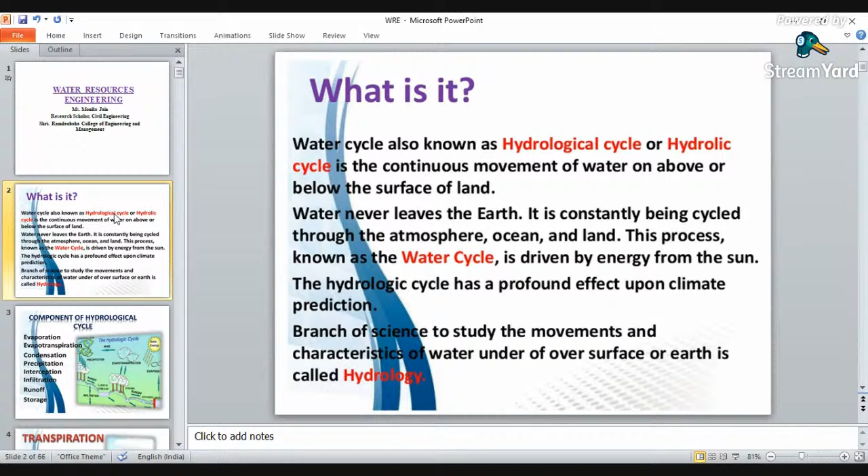There are various components of the hydrologic cycle, as we have seen, like evaporation, evapotranspiration, condensation, precipitation, interception, infiltration, runoff, and surface storage.

Now we'll see one by one, starting with evaporation. What is evaporation? It is one of the major processes in the hydrologic cycle, and evaporation is nothing but the transfer of water from the surface of the earth to the atmosphere. By evaporation, water is actually converting from its liquid state to the gaseous or vaporous state. This transfer occurs when some molecules in the water attain kinetic energy and move into the atmosphere.

This evaporation happens because of a few factors: temperature, humidity, the speed of the air or wind speed, and the energy of the environment or atmosphere, that is solar radiation. You cannot measure the quantity of direct evaporation at all points, but there are a few methods by which we can measure the quantity of evaporation. The principal source of water vapor is the ocean, but evaporation also occurs from soil, snow, drizzles, ice, etc.

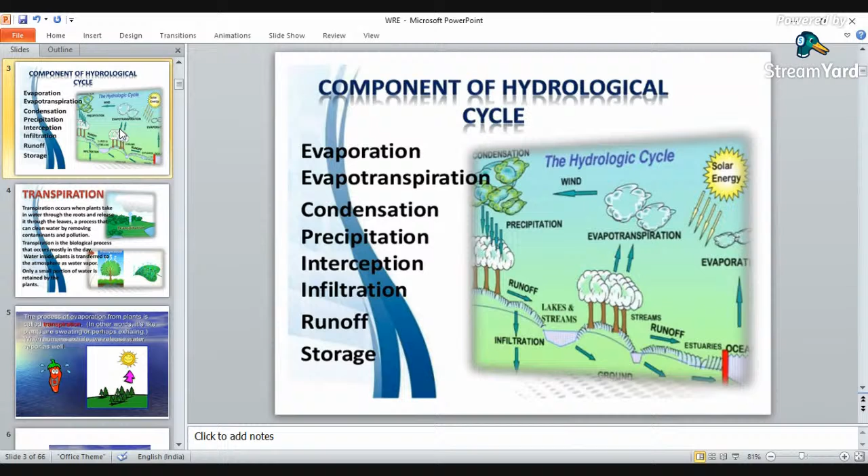So the next process in your hydrologic cycle is transpiration. What is transpiration? Transpiration is a biological process in which your water is lost in the form of water vapor from the aerial parts of the plant.

What is evaporation? Evaporation is a process in which your water is converting its state from liquid to vaporous state but from the surface of earth. Whereas transpiration is the process in which water is lost in the form of water vapor from the surface of the plants or from the green bodies. So transpiration occurs when a plant takes in water through the roots and releases it through the leaves,

a process that can clean water by removing contaminants and pollutants. There are different types of transpiration. Transpiration in plants occurs as water absorbed by the roots, then water travels through the plant roots up to the leaves, and then water vapor loss happens from the leaf, from the pores of the leaf, and it evaporates into the atmosphere. This process is termed as your transpiration.

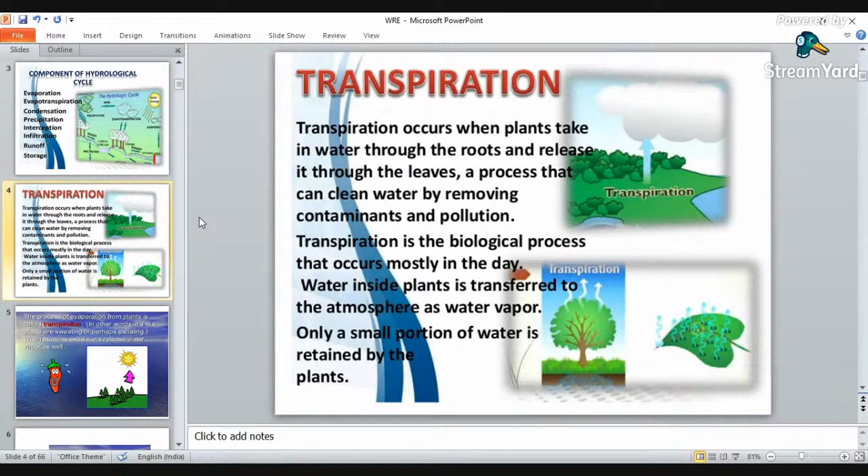Now there are three types of transpiration: stomatal transpiration, then lenticular transpiration and cuticular transpiration. These terms are defined on the basis of parts of the green bodies from where the transpiration, or the evaporation from the green body, is happening.

There are various factors on which the transpiration process depends, and those factors are the orientation of the leaf, where your leaf is actually orienting, then the water state, so level or status of water into the plant, then structural configuration of leaf and number of stomata present in your leaf structures.

Then again there are a few environmental factors like humidity, temperature, light and air. Humidity: more will be the humidity, lesser will be the transpiration. Then temperature: higher will be the temperature and lower the humidity, then higher will be the transpiration. But higher will be the humidity, lower will be the temperature, then less will be the transpiration. Then light, as the stomata are open during the daytime and close in the dark time.

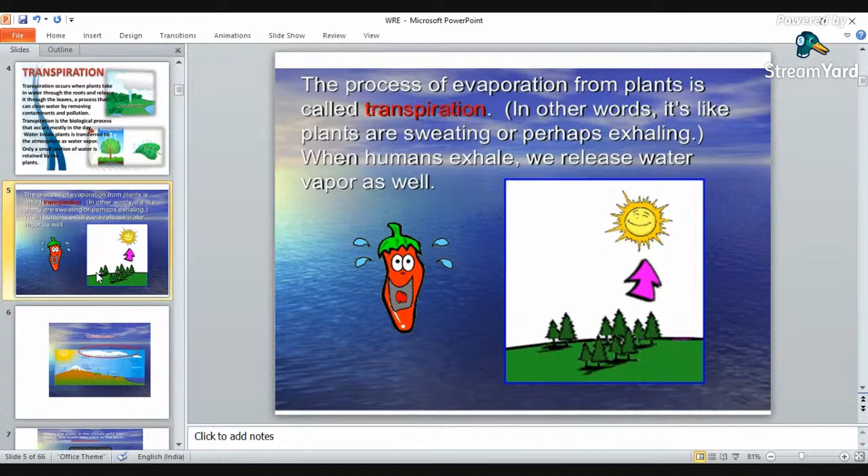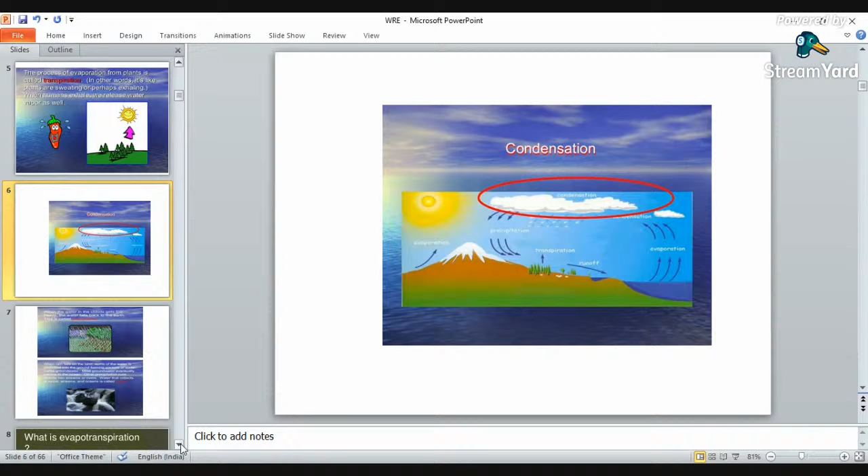Then there is precipitation. Precipitation is when water in the clouds gets too heavy in the form of water, falls back in the form of water to the earth. This is called precipitation.

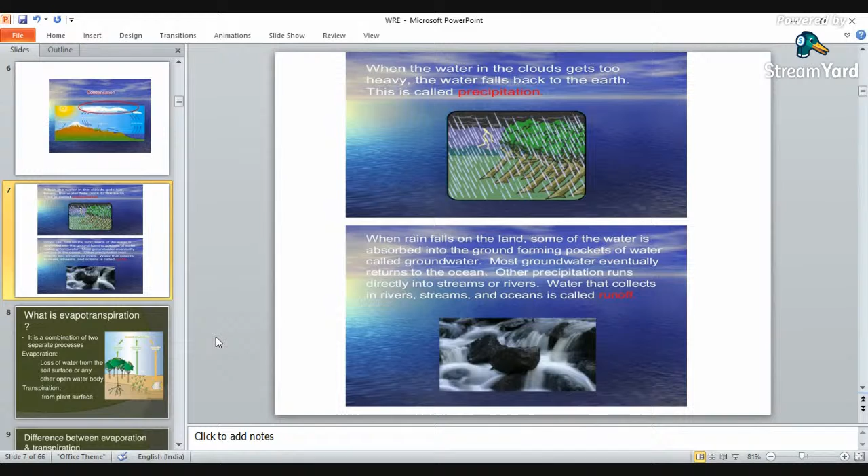The last term is your runoff. So when rain falls on the land, some of the water is absorbed into the ground, forming pockets of water called groundwater. That is the amount of water which will percolate deep into the ground and adds to the groundwater table, termed as your groundwater. Most of the groundwater eventually returns to the ocean from the surface only. The other precipitation runs directly into the streams. So that part of the water which will not get percolated into the groundwater and stays on the surface of earth is termed as your runoff.

So basically, the process of the hydrologic cycle is a continuous process which involves various stages like evaporation, transpiration, condensation, precipitation, then surface storage and runoff. All these steps or processes are continuous, happening simultaneously or one after the other.

Then there is evapotranspiration. Now evapotranspiration, as the name itself is suggesting, is a combination of two processes, that is evaporation and transpiration. Evaporation is nothing but loss of water from the soil surface, and transpiration is nothing but the loss of water from the plant surface.

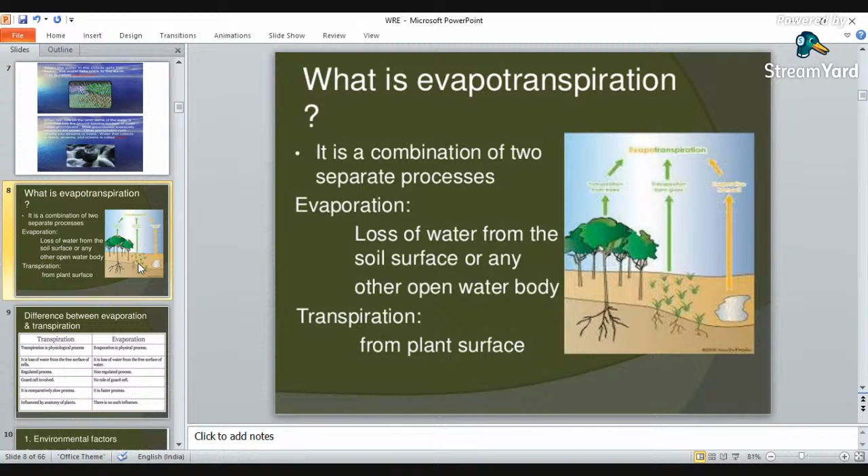Now, what is the basic difference between transpiration and evaporation? Transpiration is a physiological process and evaporation is a physical process. Is transpiration a continuous process, or is evaporation a continuous process?

Transpiration is a comparatively slow process, but evaporation is a quite faster process. Transpiration depends on the anatomy and configuration of the plant cell, but evaporation has no such influence.

If there is an open surface with water present, evaporation can happen provided there is sunlight or solar radiation. There are a few factors which affect transpiration or evapotranspiration, that is air temperature, humidity, and movement of air. The more the temperature, the higher the evapotranspiration. The more the humidity, the lesser the evapotranspiration. There are two basic terms related to evapotranspiration: potential evapotranspiration and actual evapotranspiration.

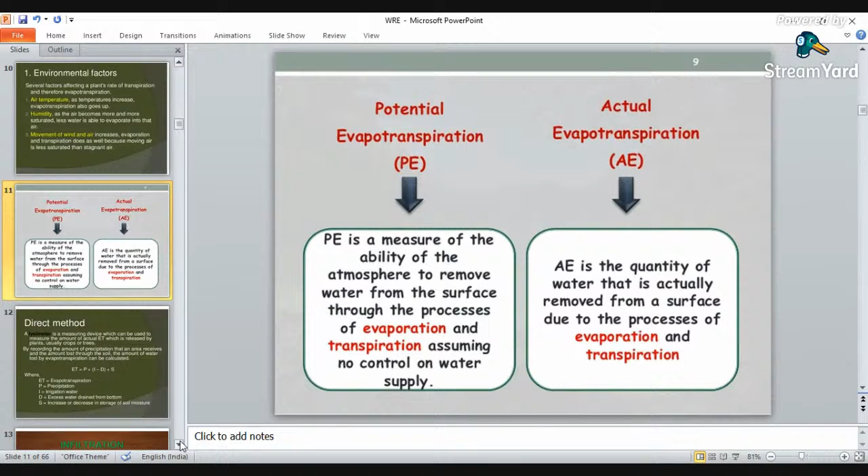There are a few empirical as well as practical and experimental methods by which we can find out evapotranspiration. A lysimeter is a device useful to measure evapotranspiration. The amount of actual evapotranspiration released by plants from crops as well as trees is calculated using the lysimeter.

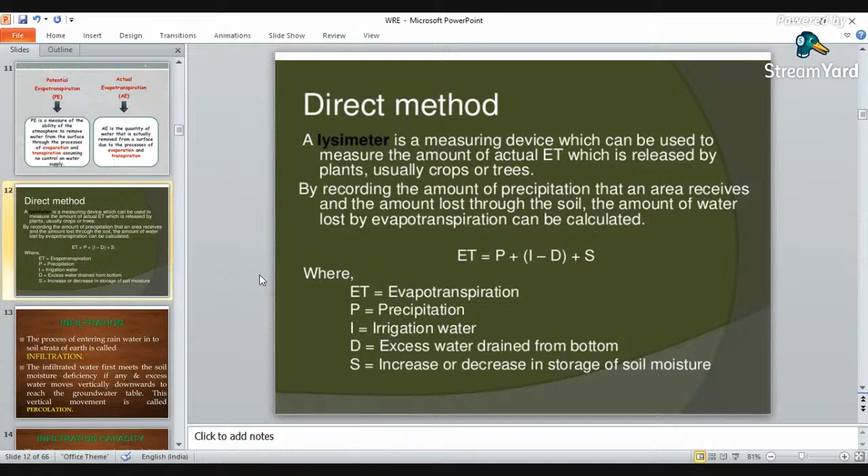There is a formula by which you can find out the actual evapotranspiration quantity, the ET value: ET equals P plus I minus D plus S, where ET is evapotranspiration, P is precipitation, I is irrigation water, D is excess water, which is nothing but runoff water, and S is the increase or decrease in the storage of soil.

The next fundamental related to hydrology is infiltration. Infiltration is the process by which water on the ground surface enters the soil, or infiltrates into the soil.

There is one more term related to infiltration, that is infiltration capacity. Infiltration capacity is the maximum amount of water that can infiltrate into the soil strata or earth surface. It is measured in meters per day, or length per unit time.

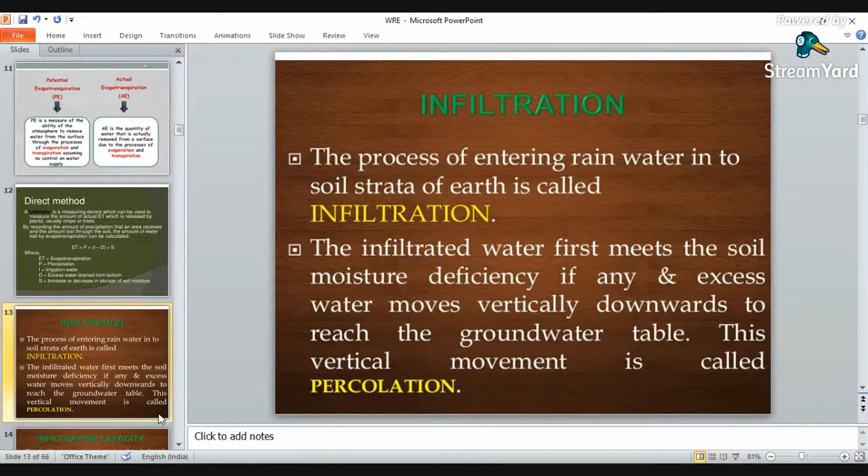Infiltration capacity is the maximum rate or maximum capacity of the soil by which water can be absorbed, and it is denoted by small f. If your rainfall rate I is greater than or equals to the infiltration capacity, then FA equals F, where FA is the actual infiltration capacity, I is the rate of rainfall, and F is the infiltration capacity.

So if I is greater than or equals to small f, then your actual infiltration capacity will be equal to your infiltration capacity. It means there will be no percolation.

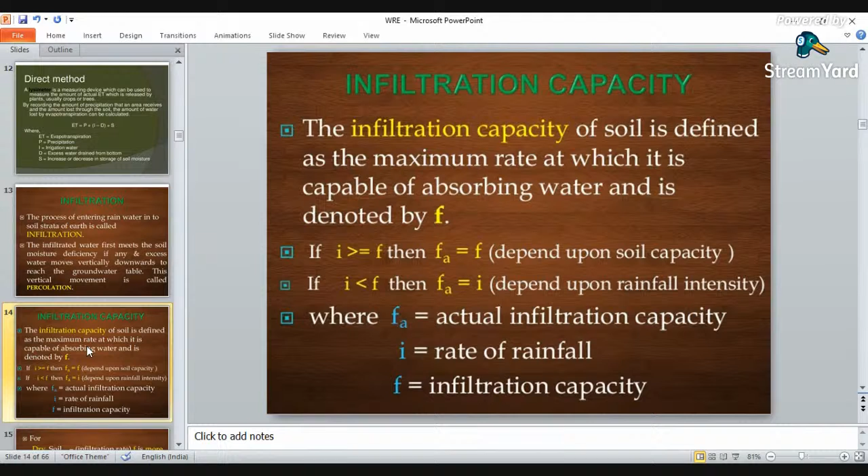And if your rate of rainfall I is lesser than your infiltration capacity, then in this case FA equals I, that is actual infiltration capacity equals rate of rainfall. So in this case, if the saturation level reaches up to the maximum requirement of the soil, that is saturation of soil water requirement, then your water may percolate.

So if your F is more, it means it is dry soil, because F is nothing but your infiltration capacity. And if F is less, then it is moist soil.

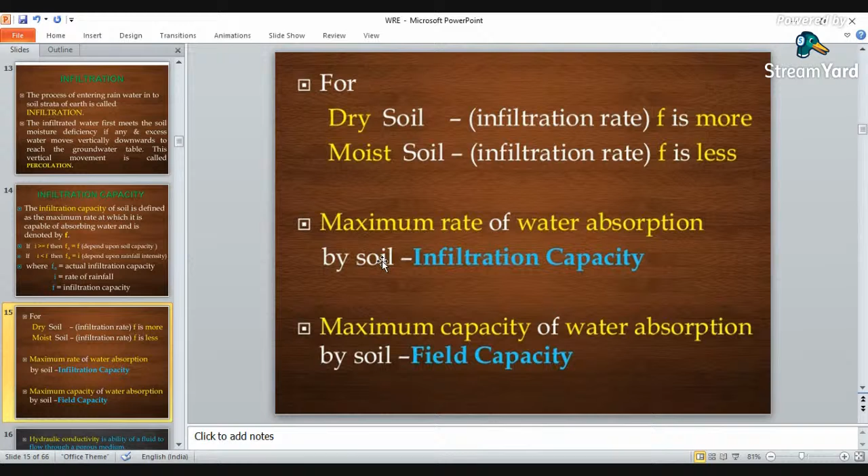There is one more term related with infiltration and precipitation, that is hydraulic conductivity. Hydraulic conductivity is the ability of a fluid to flow through a porous medium. It is determined by the size and shape of the pore space in the medium and the viscosity of the fluid. It is expressed as the volume of fluid that will move in unit time under a unit hydraulic gradient through a unit area measured perpendicular to the direction of flow.

Now, the infiltration process is continuous only if there is room available for additional water into the soil surface. The available volume for additional water in the soil depends on the porosity of the soil and the rate at which previously infiltrated water can move away from the surface through the soil. The maximum rate at which water can enter the soil in a given condition is the infiltration capacity, which occurs when the water arriving on the soil surface is greater than the infiltration capacity.

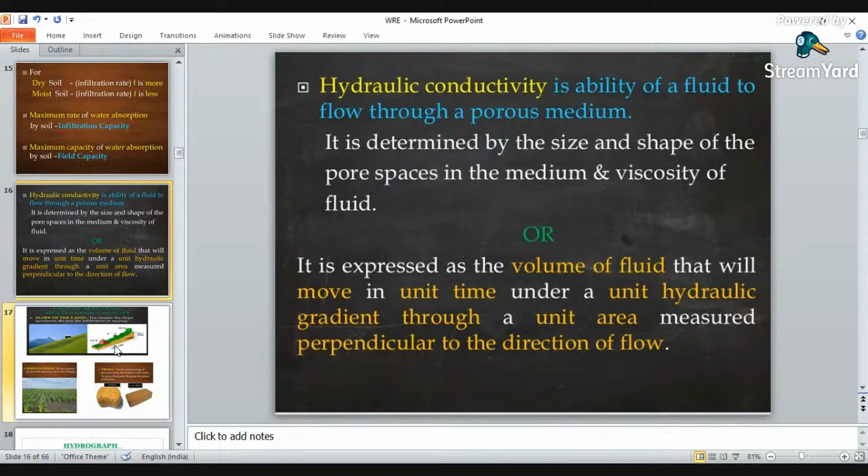Now there are a few factors on which your infiltration capacity depends. That is the slope of the land. More will be the slope, lesser will be the infiltration, because water will try to get into runoff. It will run under the gravitational force, that is why it will flow as runoff water.

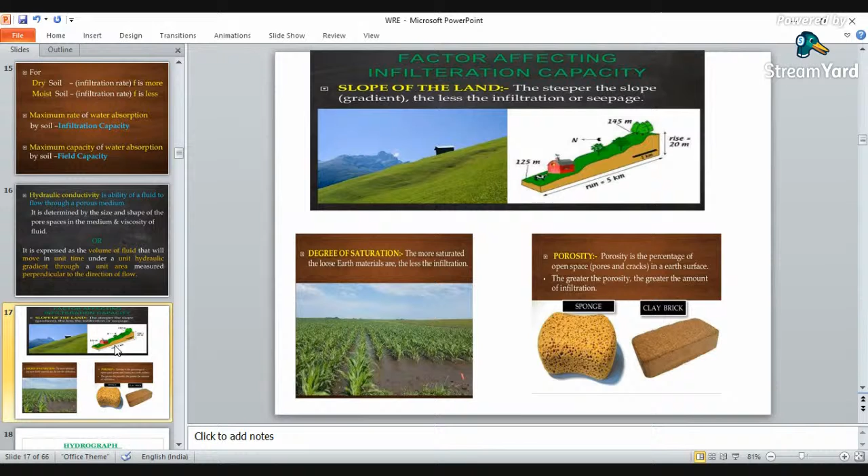Then degree of saturation - more saturated the soil, lesser will be the infiltration. Then porosity - more porous the soil, more will be the infiltration. Like soil and concrete, they are more porous materials as compared with metallic materials, so there will be more infiltration rate into these materials.

Then your next topic is hydrographs. Hydrographs are nothing but the plots which are plotted for the discharge and the time. These are graphs showing the rate of flow versus time over a specific point in a river or other channel. The rate of flow is typically expressed in cubic meters per second or meter cube per second, and time is expressed in seconds, minutes, or hours.

So it is a graph actually showing the total volume of water that is entering into the catchment, or you may say leaving the catchment, over a particular period of time.

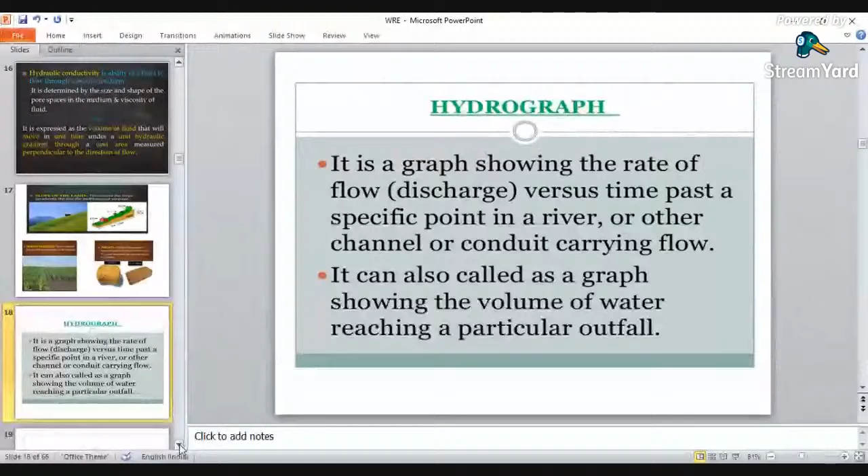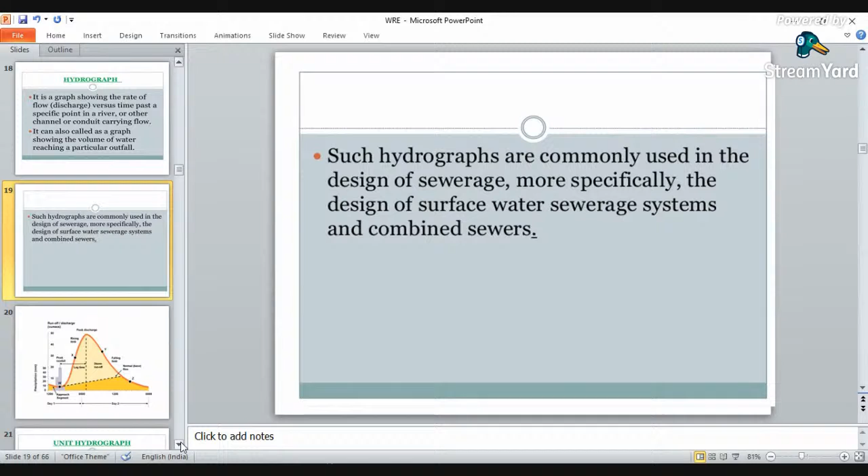Hydrographs are used for design of sewerage, specifically design of surface water sewer pipelines, water pipelines, etc. There are a few elements of this hydrograph. This is how the hydrographs look like.

Here, there are a few terminologies related with this hydrograph. First is your discharge. Then there is one rising limb, from W to X, this limb is your rising limb. Then there is a peak discharge - this discharge is your peak discharge. Then there is a recession or falling limb - this limb is termed as recession or falling limb.

Then there is a lag time. Lag time is the time from the first peak rainfall to the peak discharge. This is termed as your lag time. And the time of peak is the total time from the first rainfall point to the peak discharge point. We have to read this graph from left to right.

Here you are given the precipitation. This is nothing but your discharge. It may be either in meter cube per second or in mm of depth to the duration. Here your duration is given in days, but it may be also in hours, seconds, or minutes.

So what is discharge? Discharge is nothing but the rate of flow passing through a specific location into a river, channel, or any water body. It is measured at a specific point where you have to plot your hydrograph.

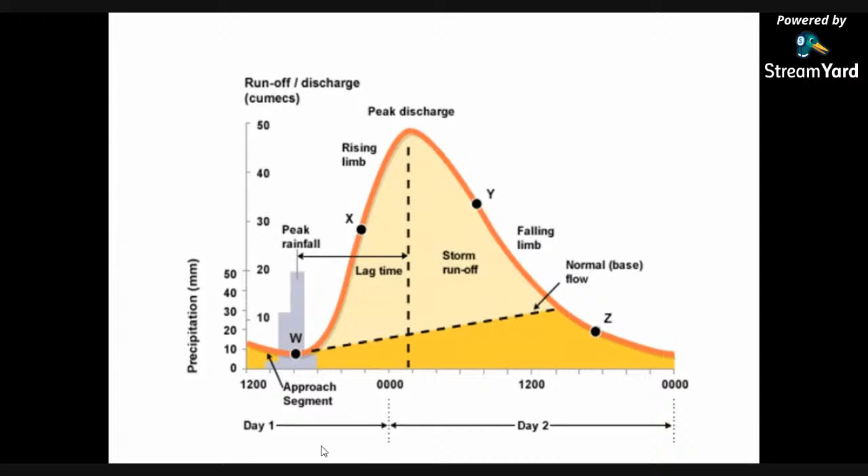There are so many types of hydrographs like storm hydrograph, flood hydrograph, annual hydrograph, then direct runoff hydrograph. Then one more basic and very important term related with the hydrograph is the unit hydrograph. Unit hydrograph is the amount of runoff resulting from 1 centimeter of rainfall excess.

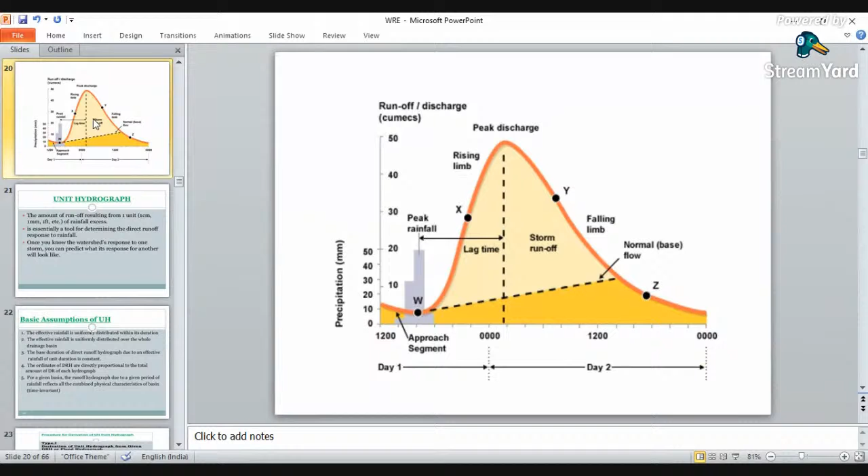Now, in a hydrograph, you may plot any amount of discharge for any amount of duration. But in a unit hydrograph, you have to plot a graph of water for the 1 centimeter or 1 unit of rainfall excess. It is the essential tool for determining the direct runoff response to the rainfall.

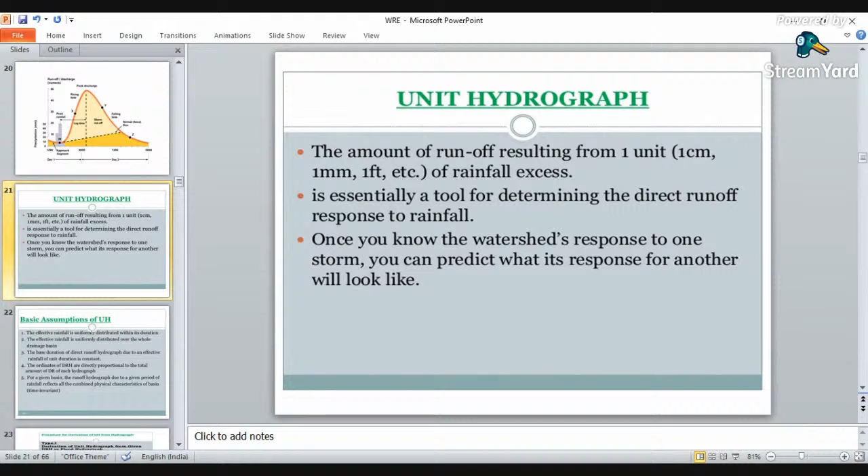Once we know the unit hydrograph for any catchment, then you may go for multiple hydrographs related with that - 2 centimeter hydrograph, 4 centimeter hydrograph. So once you know the unit hydrograph, you can plot the hydrograph related with the respective different depths of the catchment flows or catchment rainfalls.

There are a few basic assumptions related with the unit hydrograph. The effective rainfall is uniformly distributed within its duration. Then again, the effective rainfall is uniformly distributed over the whole drainage basin.

The base duration of the direct runoff hydrograph due to an effective rainfall of unit duration is constant. The ordinates of DRH, that is direct runoff hydrograph, are directly proportional to the total amount of direct runoff of each hydrograph. For a given basin, the runoff hydrograph due to a given period of rainfall reflects all the combined physical characteristics of the basin, that is time invariant.

Here, two assumptions are very important. One, we have to consider uniform rainfall distribution, that is, the rainfall distribution over a catchment is uniform. Second, it is time invariant, that is, for a given basin, the runoff hydrograph due to a given period of rainfall reflects all the combined physical characteristics of the basin, having the same physical properties over time for the rainfall, catchment, and runoff.

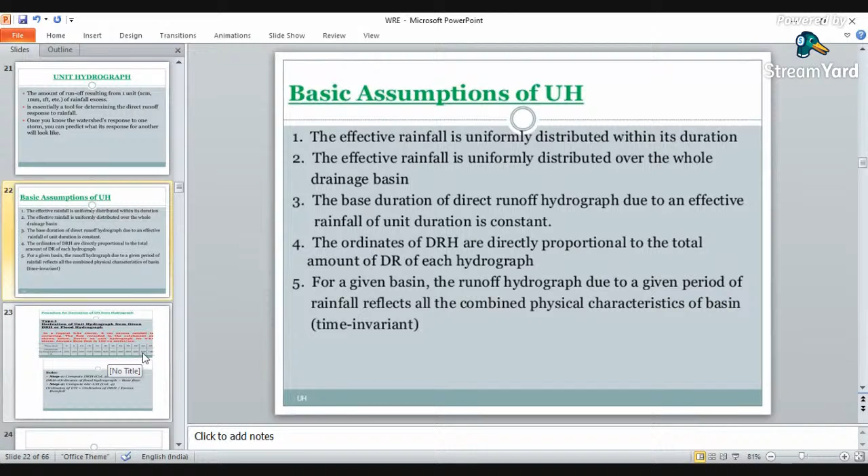So how can we draw a hydrograph? Just go through it. If you have to plot a hydrograph, a problem is given here. Just read out this problem now.

In a typical 6-hour storm, 4 centimeter excess rainfall is occurring. The flow recorded in the catchment is shown below. Derive a unit hydrograph for the 6-hour storm, assuming base flow as 100 cubic meter per second. You have to find out the unit hydrograph for 6 hours, that is 1 centimeter of rainfall for a 6-hour storm. The base flow is given as 100 meter cube per second.

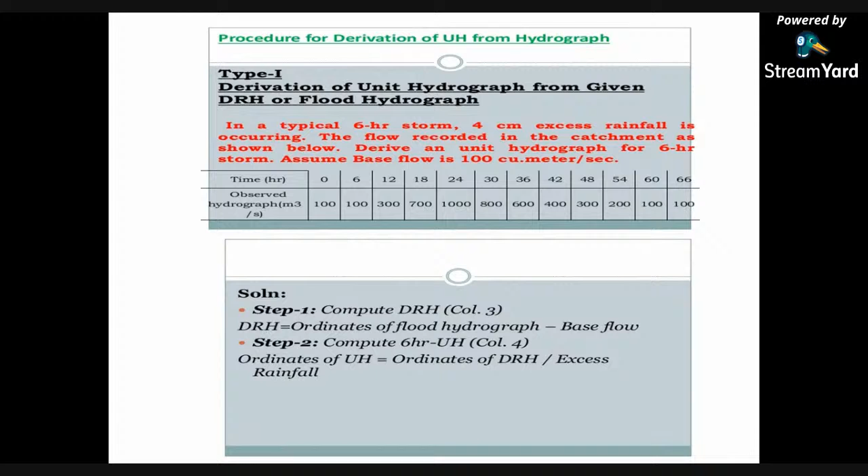Now you are given two ordinates, that is, time is given and then hydrograph values are given, discharge is given. First of all we have to find out the direct runoff hydrograph, that is DRH, and then find out the unit hydrograph for the 6-hour duration. So we are given the time duration, and this is your observed hydrograph readings. These two columns are given to you.

Now in the third column, you have to reduce the base flow. Here your base flow is given as 100 cubic meter per second. So in the third column, you subtract the base flow from the observed hydrograph reading: 100 minus 100 equals 0, 100 minus 100 equals 0, 300 minus 100 equals 200, and so on. This is your direct runoff hydrograph, that is, the amount of hydrograph that will flow on the surface.

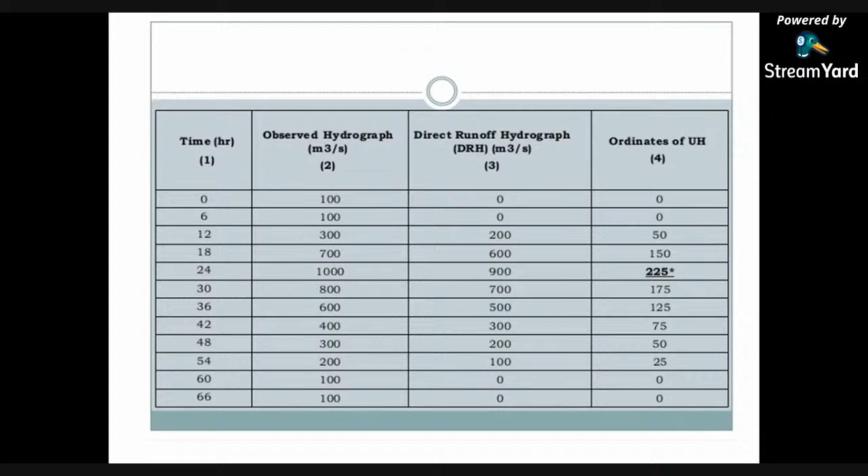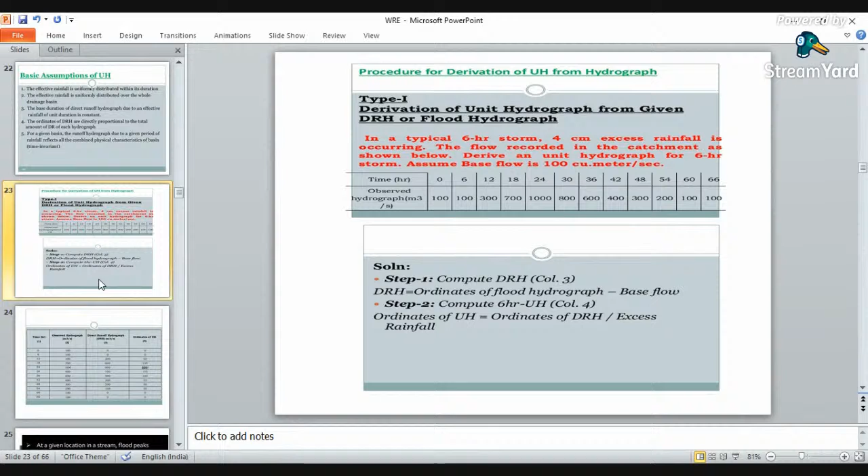Then you have to find the ordinates of the unit hydrograph. These are calculated as the amount of direct runoff hydrograph divided by the given excess rainfall. You are given 4 centimeter excess rainfall, so the ordinates given are for 4 centimeters of rainfall. To find the ordinates for 1 centimeter, divide these ordinates by 4: 200 divided by 4 equals 50, 600 divided by 4 equals 150, and so on. At the end, you may also plot a graph of time versus discharge, with discharge on the y-axis and time on the x-axis.

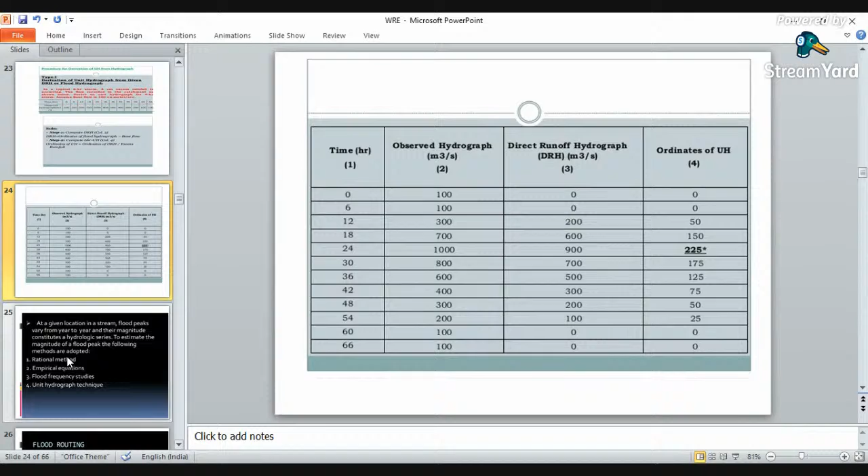There are so many methods by which you can estimate the magnitude of discharge, that is, by rational methods, empirical methods. Unit hydrograph is one of the methods, and flood frequency studies is another.

The next topic is flood routing. Flood routing is a process or technique. It is useful in determining the flood hydrograph at a section of a river by utilizing the data of flood flow at one or more upstream sections. If you have a hydrograph for the upstream side, or the downstream side, by using that flood hydrograph at any one section of the catchment, you can find out the hydrograph of another section of the catchment, that is termed flood routing or the flood hydrograph.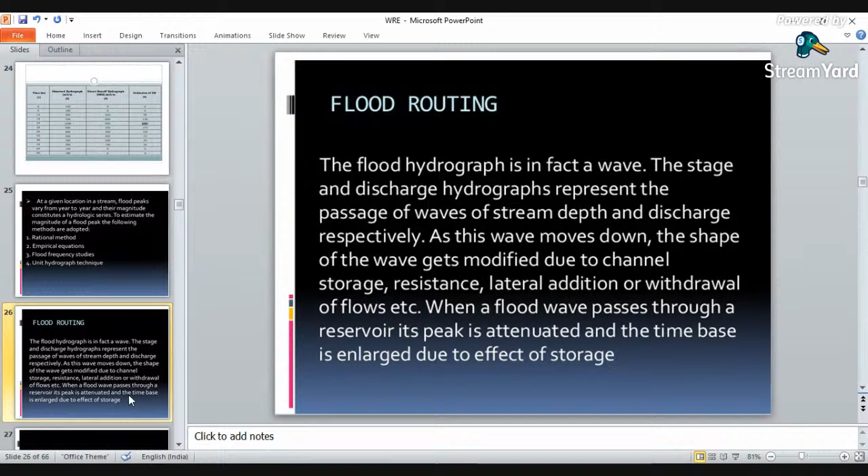In flood routing analysis, we have to determine the flow hydrograph at a given point on a watershed from the known hydrograph on either the upstream or downstream side. So what will happen? There is an attenuation. Suppose on the upstream side the depth of the hydrograph is high, so on the downstream side there will be an attenuation. Attenuation is nothing but the reduction in the peak of that hydrograph. The peak of the outflow hydrograph will be smaller than that of the inflow hydrograph, and this reduction in the peak of the hydrograph is termed attenuation.

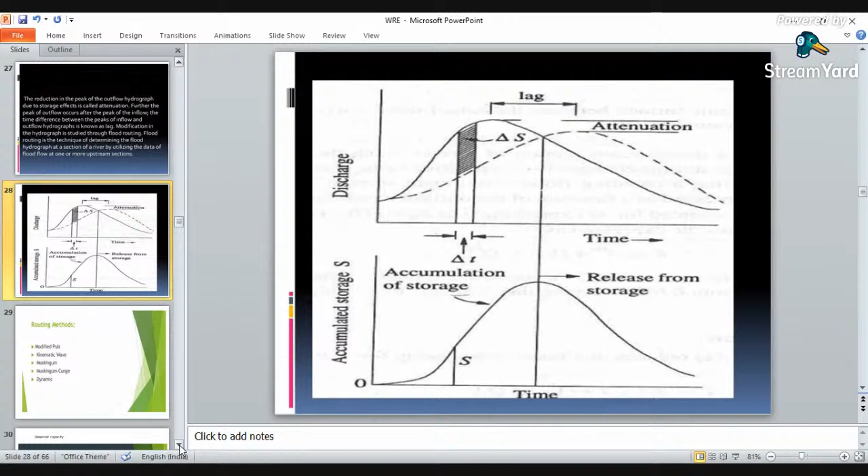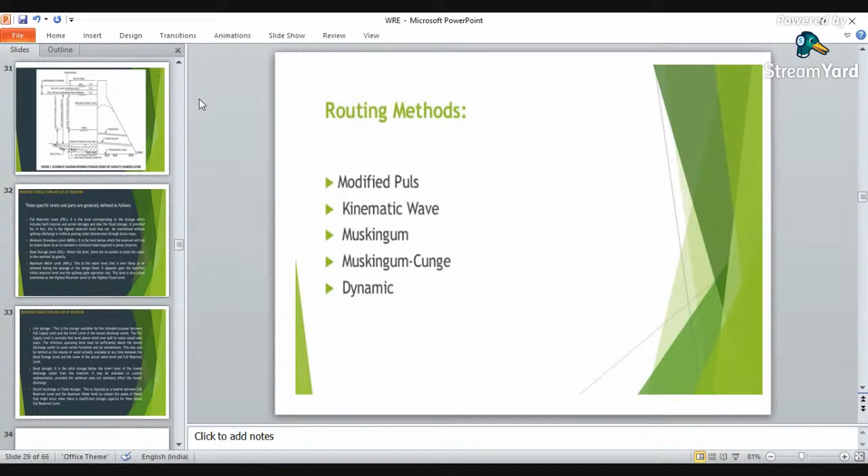So there are a few methods for flood routing. The Muskingum method is one, where we are given the equation S equals K times [x times I plus 1 minus x into O]. By using this equation, you can directly find the flood discharge at another point, or on the downstream side of the catchment. Then there is the reservoir routing method, the dynamic method, and the modified Puls method.

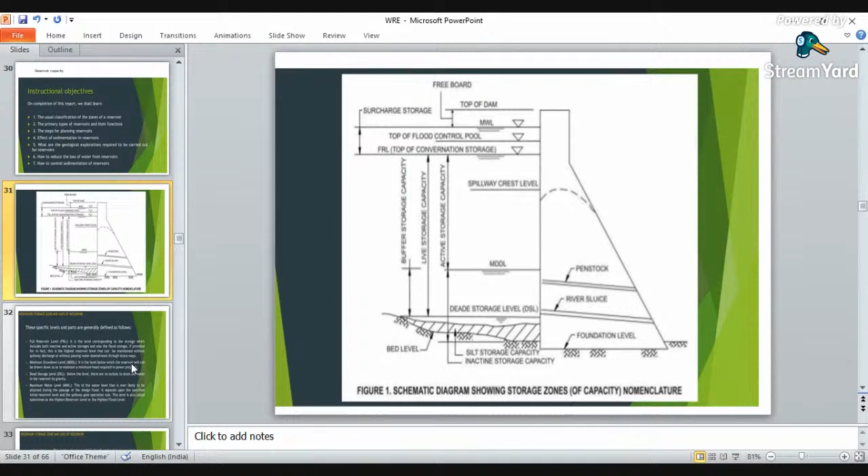So dead storage level is the... here, see here, it is the dead storage level. This level is your dead storage level. This level is your spillway crest level. Then this is your foundation level. This is the bed level of your storage. So dead storage is basically provided below the level where there are no outlets.

Then there is a full reservoir level. It is the level up to which you can attenuate the maximum amount of water, or maximum flood storage can be provided up to the full reservoir level.

Then minimum drawdown level is the level below which the reservoir will not be drawn down, so as to maintain a minimum head required for the power projects. The maximum water level is the water level that is ever likely to be attained during the passage of the design flood. By this, your water should not exceed that level. That is the maximum water level.

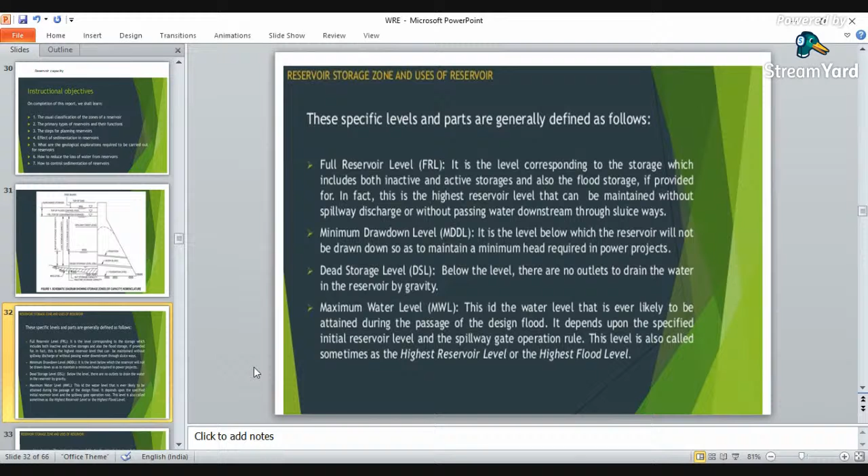Now here, for solving the reservoir capacity, you may use the mass flow method. Mass flow method is basically the easiest method to solve storage reservoir problems. Although it is very simple and straightforward, a few shortcomings are also there.

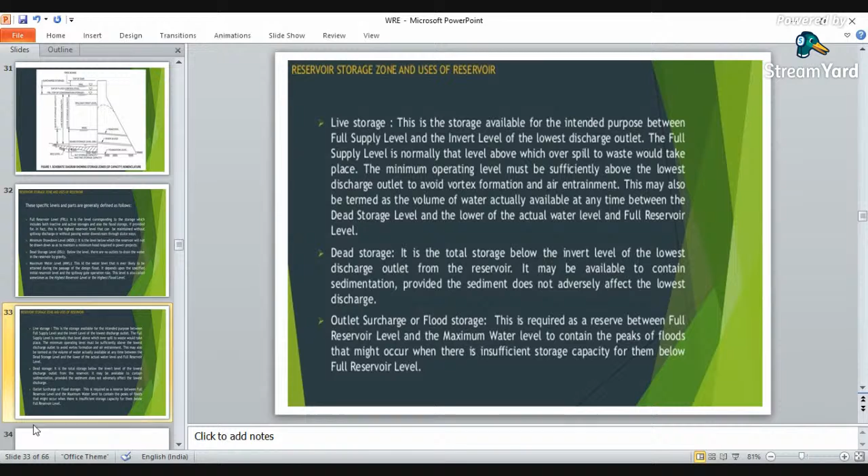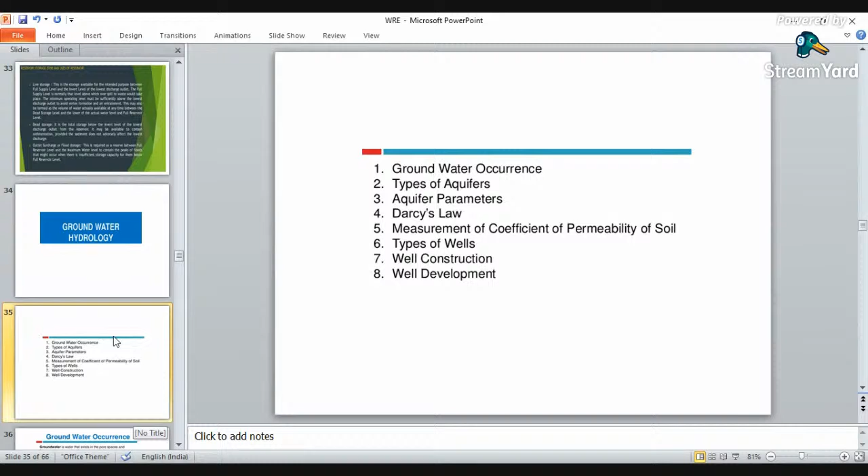Then after storage capacity we will move to groundwater hydrology. Now in groundwater hydrology, first we must understand about groundwater. What is groundwater basically?

Now the total volume of water on our earth's surface is approximately 13.6 into 10 raised to power 8 kilometer cube, out of which 8.3 into 10 raised to power 6 is stored in the form of groundwater only, which is approximately 0.62% of the total water of the earth.

Groundwater is again the water present beneath the earth's surface, and groundwater is that water which exists in the pore spaces and fractures of rocks and sediments beneath the unsaturated zone of soil, which can flow freely into wells, tunnels, and springs. That is the open spaces below the ground area.

It depends on the following factors: porosity, saturation, permeability of soil, how many aquifers are there into the soil structure, and the storage capacity of this groundwater.

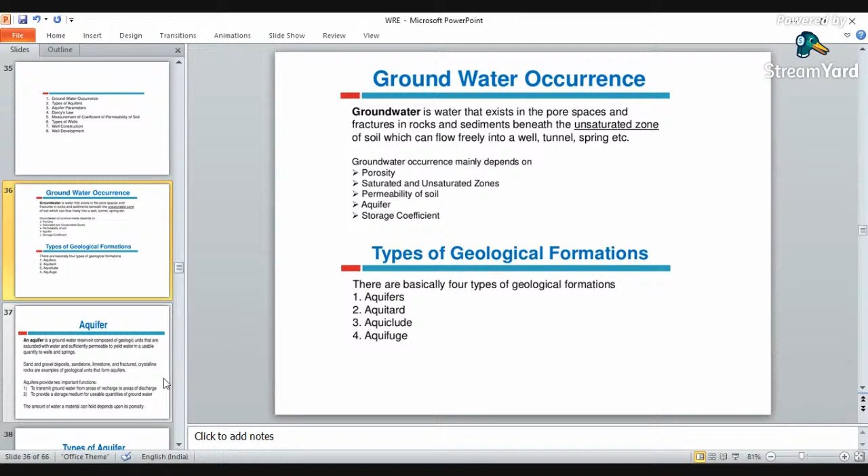And there are aquifuge materials. Aquifuge materials or formations cannot even hold water, and water cannot flow out of them. Aquifers are materials that have both water holding and water flowing capacity. Aquitards cannot hold water but water may pass through them. Aquiclude can hold water but water cannot flow through it or be extracted. And aquifuge materials neither allow water to flow out nor hold water. Aquifers are the materials which have water and from which you can extract water.

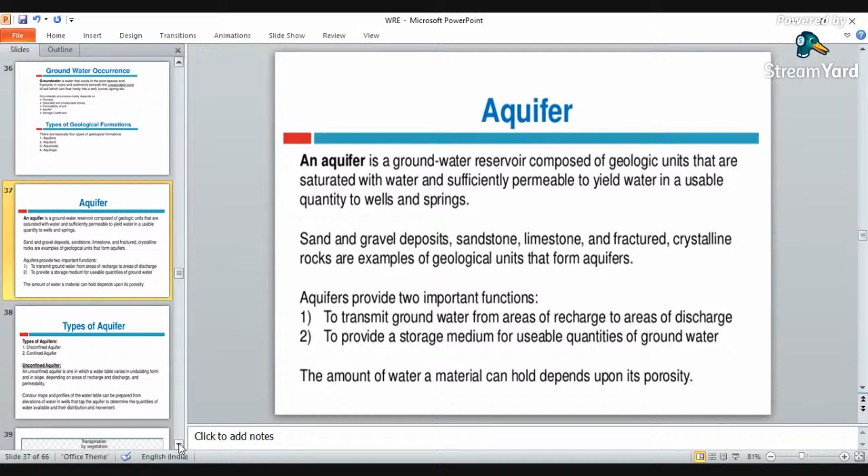Aquifers are layers of porous substrate that contain and transmit groundwater because they have water transfer capability. Water can flow directly between the surface and the saturated zone of the aquifer. Now there are two types of aquifer: first is confined aquifer, and the other is unconfined aquifer.

Confined is a condition where your water layer or formation is sandwiched between two different layers. It is packed from both sides - this condition is termed a confined aquifer. Then there is unconfined aquifer, which is not packed from both sides. It may be packed from one side but has an open surface on the other side. That aquifer is termed your unconfined aquifer.

This is the confined aquifer as it is sandwiched between different layers on both sides - this water body is sandwiched between two different geological strata, termed a confined aquifer. But if there is a water body on the surface, that will be termed an unconfined aquifer, because it is confined from one end but open to the surface on the other end. So there are two types of aquifer: confined aquifer...

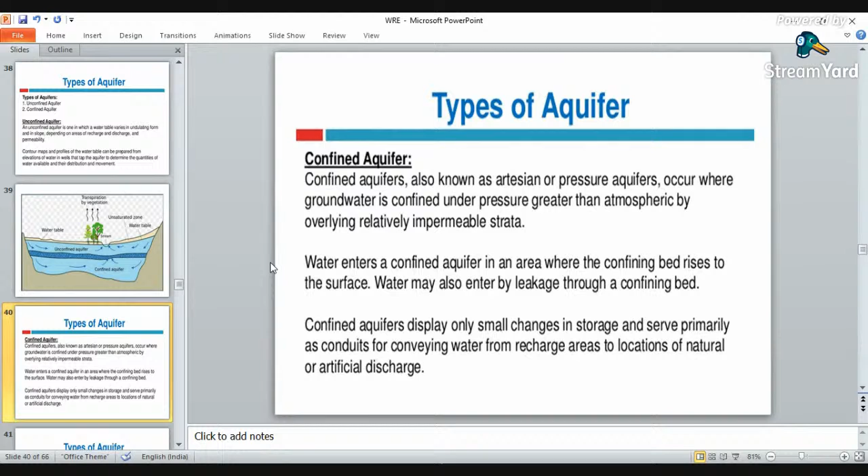Confined aquifers are also termed artesian or pressure aquifers, and they occur where groundwater is confined under pressure greater than atmospheric, by overlying relatively impermeable strata. So here it is the confined aquifer which is enclosed by two impermeable strata.

Then there are types of aquifers we have discussed - that is aquitard, aquiclude, and aquifuge.

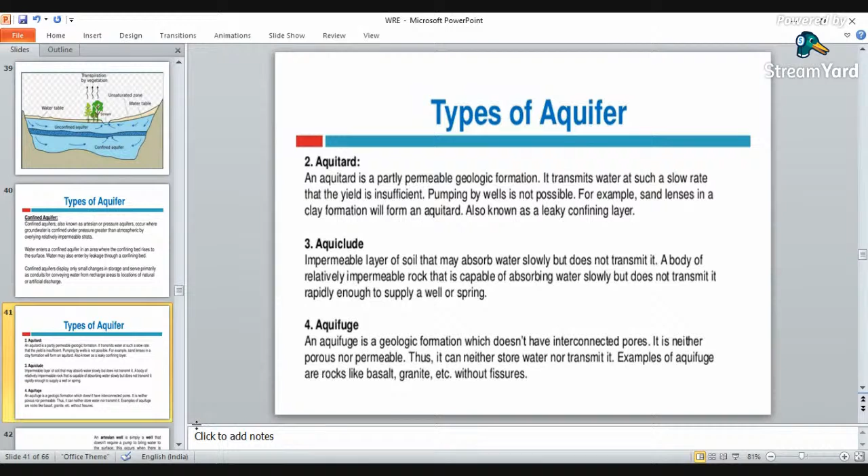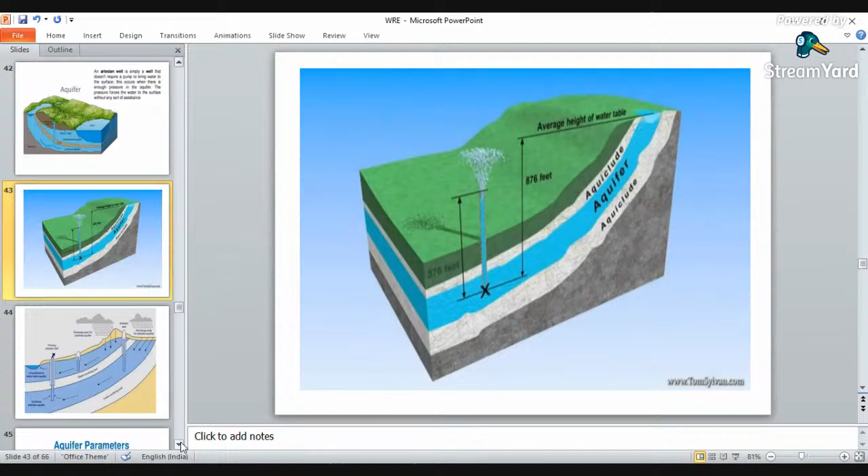Here this is the confinement - confinement means a hard layer bed or rock strata. Then there is a confined aquifer between two hard beds or two different hard stratas. So this is your confined aquifer, also called artesian aquifer. Then here in this aquifer, the water is confined at the bottom only and is free to atmosphere on top - so this is your unconfined aquifer or water table aquifer.

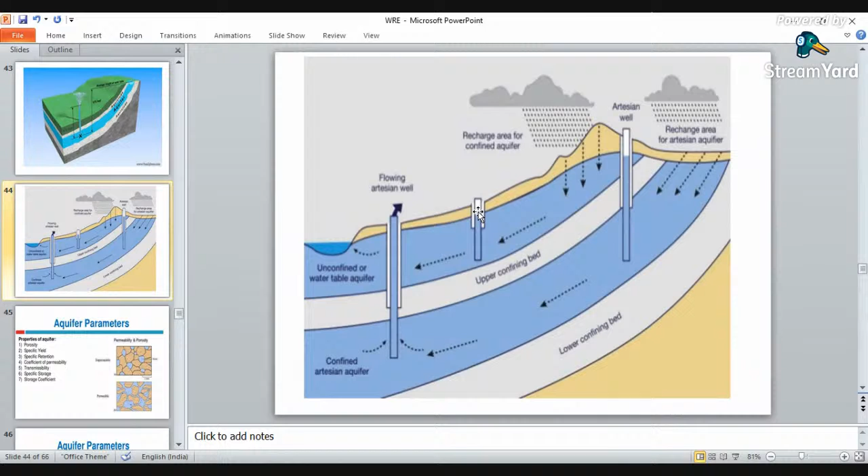Unconfined aquifers occur at shallow depth from the surface of the earth, whereas confined aquifers occur at the deepest depth from the surface of the earth.

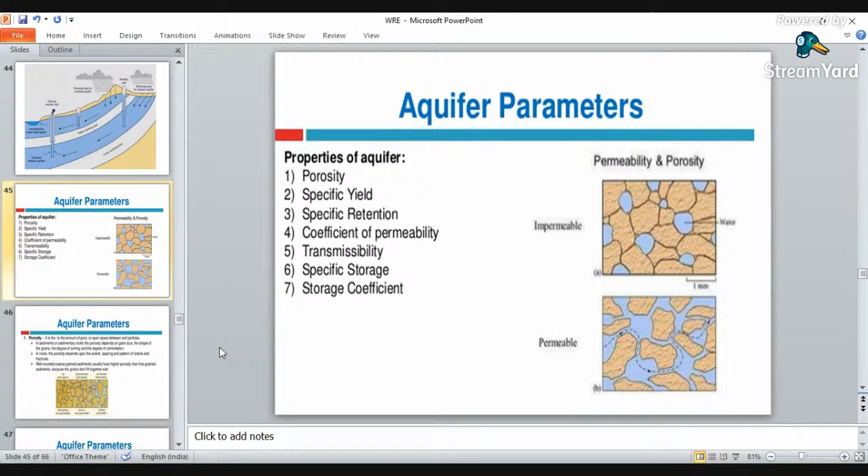So there are few factors or terminologies related with aquifers: porosity, specific yield, specific retention, coefficient of permeability, specific storage, transmissibility, and storage coefficient.

So aquifer relates to the amount of water that can be extracted out of it. Aquifers are nothing but your wells - these are termed artesian wells. Our well is one type of unconfined aquifer because we have extracted it from shallow depth. If your well is extracted up to deeper depth, then this is also termed your confined aquifer. So aquifers may be equivalent to your hydraulic wells or open well.

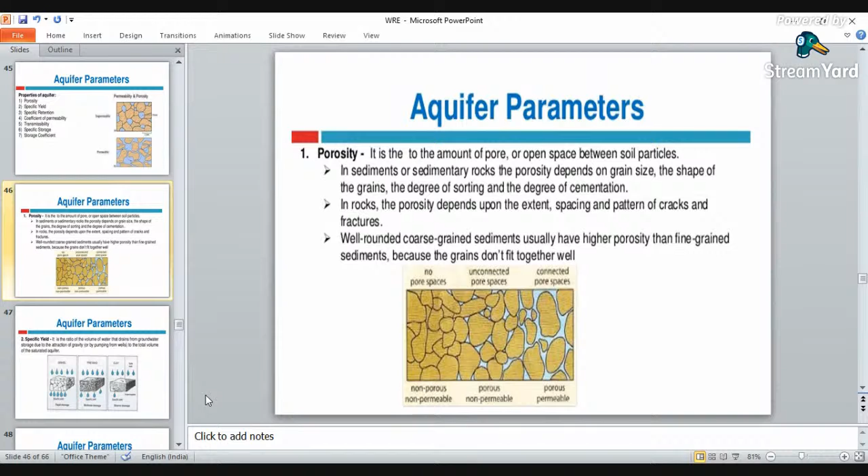So one of the factors of the aquifer is the porosity.

Then there is one more term, that is specific yield. Specific yield is the ratio of volume of water that drains from the groundwater storage due to attraction of gravity, to the total volume of the saturated aquifer.

Then there is specific retention. Specific retention is the ratio of volume of water that cannot be drained out, to the total volume of saturated aquifer - the water which cannot be taken out from the aquifer or soil strata is termed specific retention.

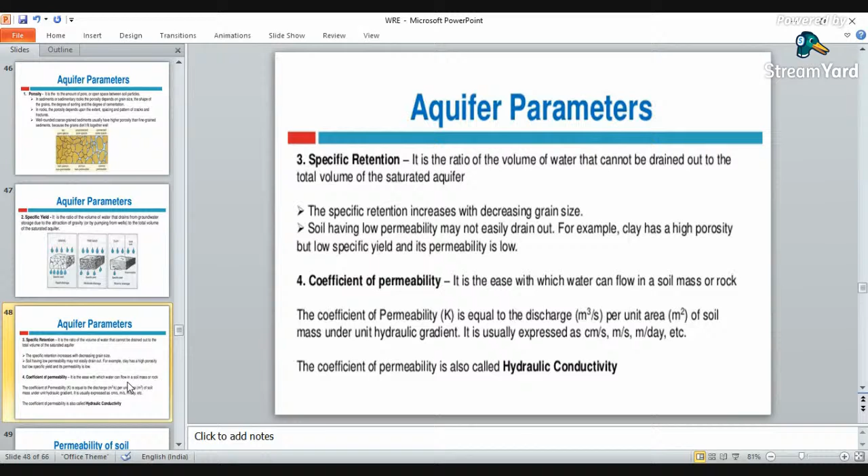Then permeability of soil - permeability of the soil is the ability of water to flow out of the pores or voids of the surface.

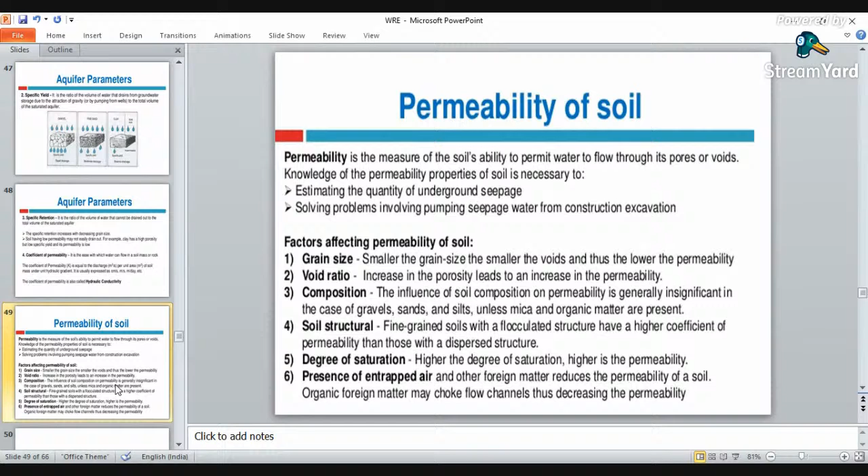To find out the permeability, there is a coefficient of permeability. This coefficient of permeability can be found out by laboratory test or by field test. There are so many methods by which this can be done.

One of the methods which is most useful and likely to be used is Darcy's method. By Darcy's method, we get a formula to find out the coefficient of permeability: Q equals KAI, where Q is the discharge, K is the coefficient of permeability, A is the cross sectional area, and I is the hydraulic gradient. Hydraulic gradient is the ratio of depth to length of the section, that is H by L.

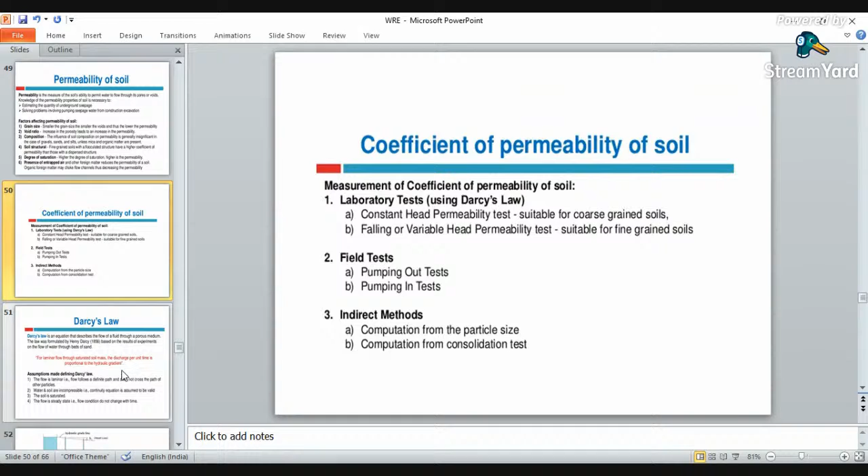There will be a direct question on Darcy's law, asking how one can find out the coefficient of permeability using Darcy's law or Darcy's formula. So here it is given that Q equals KAI. I is the hydraulic gradient, that is depth per unit length. K is the coefficient of permeability, A is the cross sectional area, and Q is the amount of discharge.

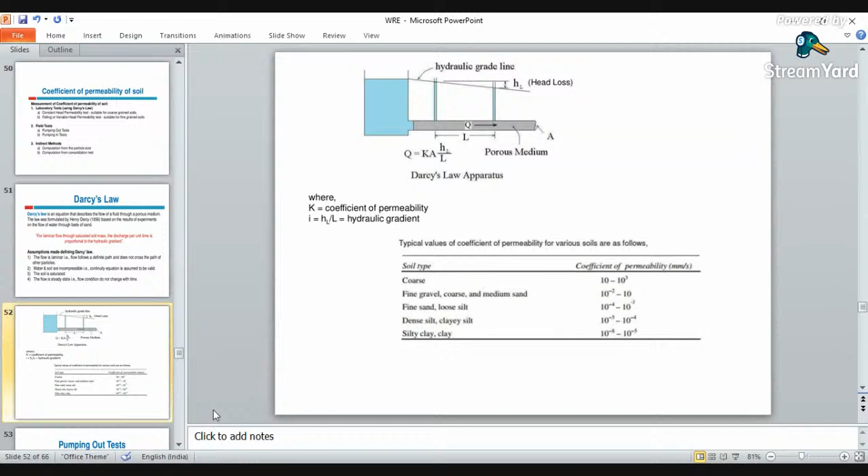The coefficient of permeability has a list of variations given for different materials. The coefficient will be different for each.

Then there are different field tests, that is the pumping out test. In pumping out test, one of the scientists named Dupuit has given a theory which is given for the well hydraulics, also termed as well hydraulics.

The coefficient of permeability of the permeable layer can be determined by pumping from a well at a constant rate and observing the steady state water table in nearby observation wells. The steady state is established when the water levels in the test well and the observation well become constant.

When water is pumped out from the well, the aquifer gets depleted of water and the water table is lowered, resulting in a circular depression in the phreatic surface. This is referred to as the drawdown curve or the cone of depression.

Now there are so many governing equations for the radial flow in the aquifer, that is how water will flow into the aquifer, into your well. So there are two to three derivations to find out the amount of discharge in confined aquifer and in unconfined aquifer.

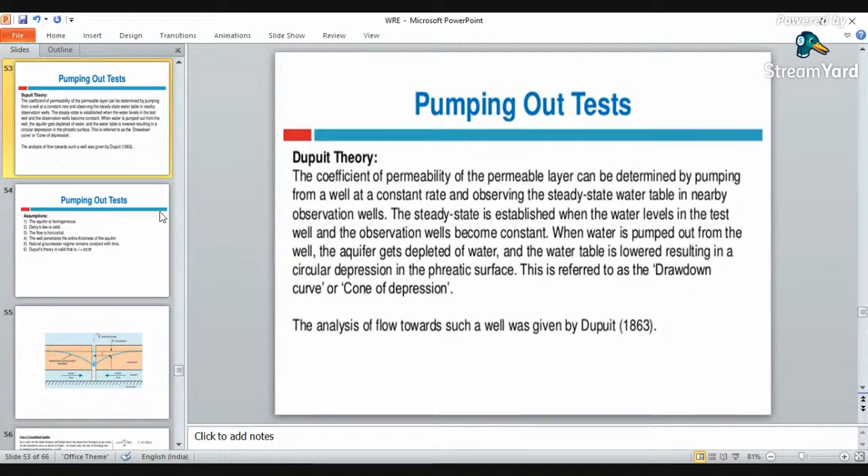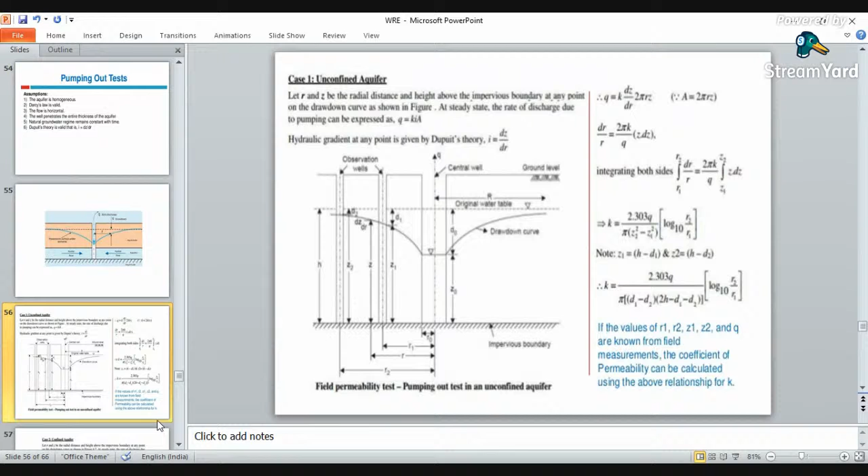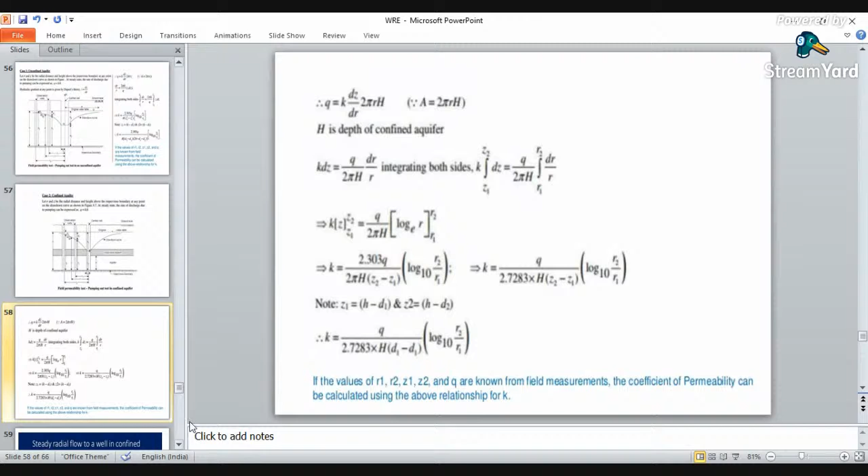Then for confined aquifer, again we are having a derivation, and the coefficient of permeability will be calculated as q divided by 2.7283 into h into d1 minus d2 into log to the base 10 r2 by r1. Now here see,

This is the final formula for confined aquifer. But if it is mentioned that you are having steady radial flow, then your equation will be reduced to q equals 2 pi r b k into dh by dr, where b is the width of aquifer, k is your coefficient of permeability, dh is the depth of well, and dr is the diameter of your well.

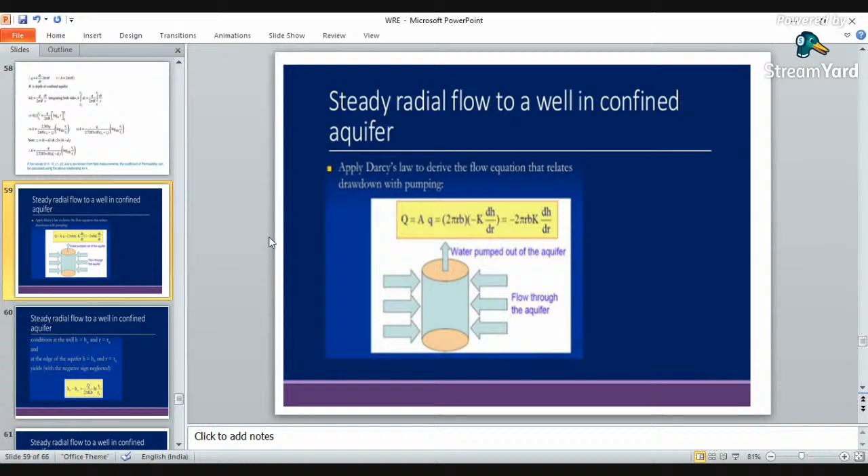Again, if steady radial flow in a well is confined aquifer, then there are few conditions you can directly use, that your depth of the aquifer will be equal to directly depth of the water, and your equation will reduce to this equation.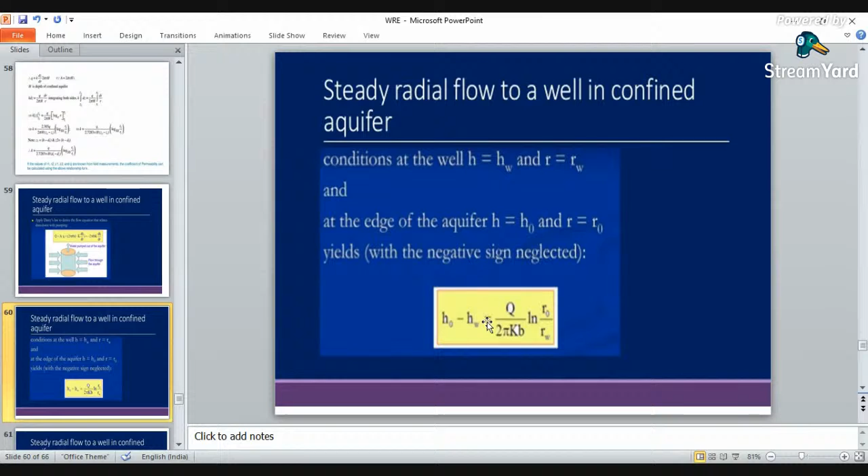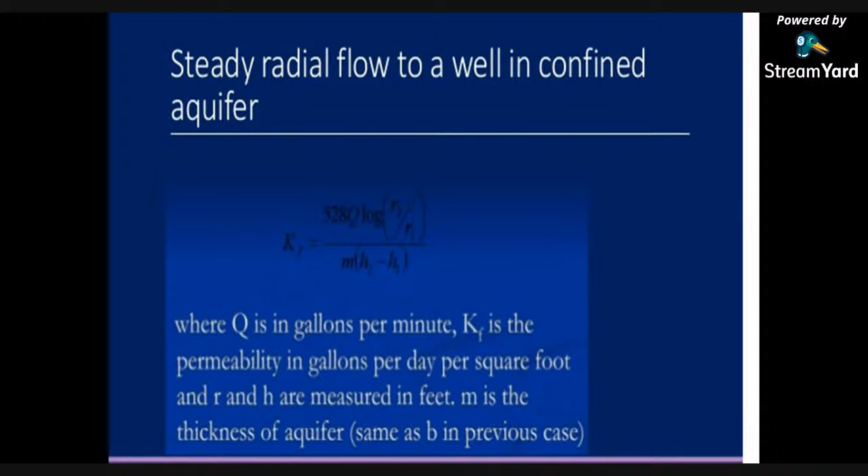We have seen these equations. And if you have to find out the discharge when your well is in confined aquifer, then this is the final formula where Q is in meter cube per second. For our references, K will be in permeability, and depth can be in meter or mm.

Here, an example is given: hydraulic conductivity of an artesian aquifer being pumped by a fully penetrating well. The aquifer is 100 feet thick and composed of medium sand. The steady state pumping rate is 1000 GPM. The drawdown at an observation well 50 feet away is 10 feet. In a second observation well, it is 500 feet.

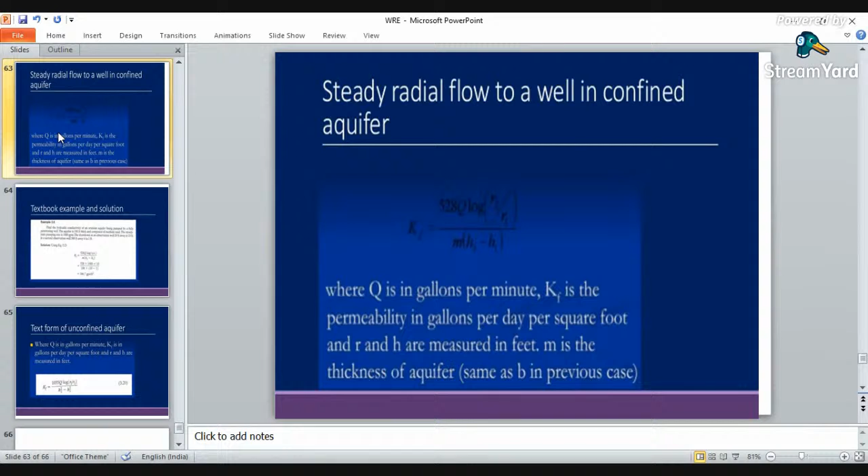So two different depths are given, two different observation well diameters are given. So you will use this formula directly: 528 Q log to the base 10 r2 by r1, divided by m into h2 minus h1. So here all values are given.

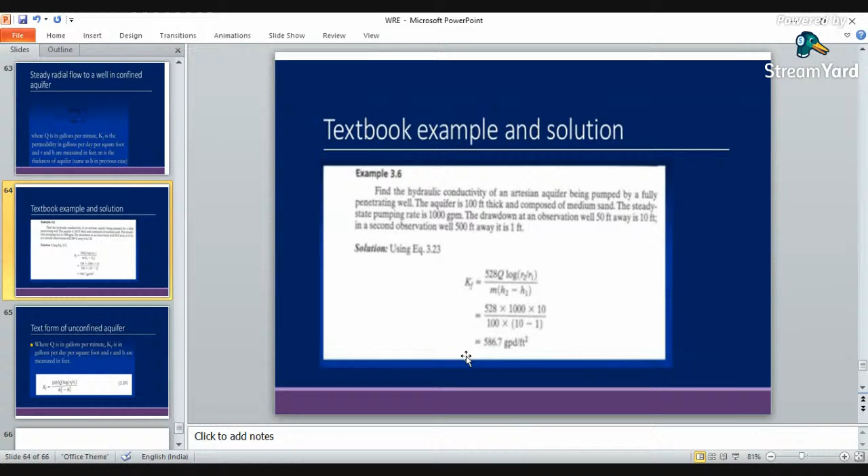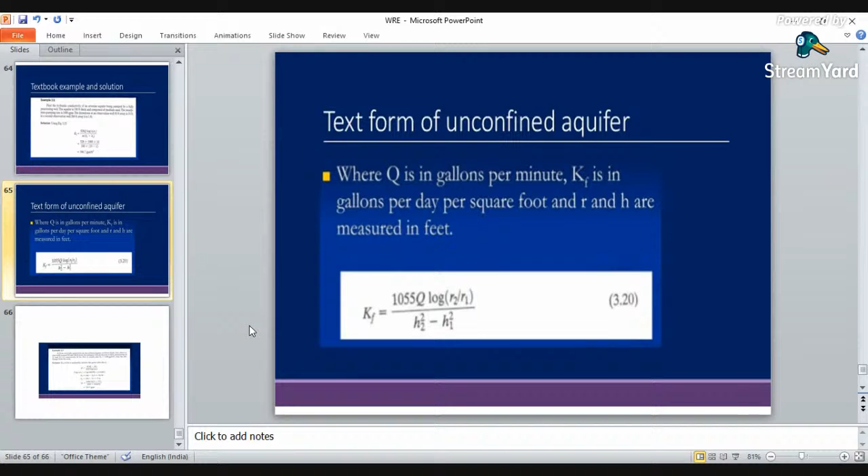Then again, to find out discharge in unconfined aquifer, you are having an equation, a consolidated equation. There are so many types of equations. We can consolidate those equations according to the given data. So this can be one of the consolidated equations, that is 1055 q log to the base 10 r2 by r1, divided by h2 square minus h1 square.

So in this problem, a 20-inch well fully penetrating an unconfined aquifer of 100 feet depth. Two observation well diameters are given, and the pumped out well is known to have the drawdowns of 23 and 21.5 respectively. If the flow is steady, Kf is given, find the discharge.

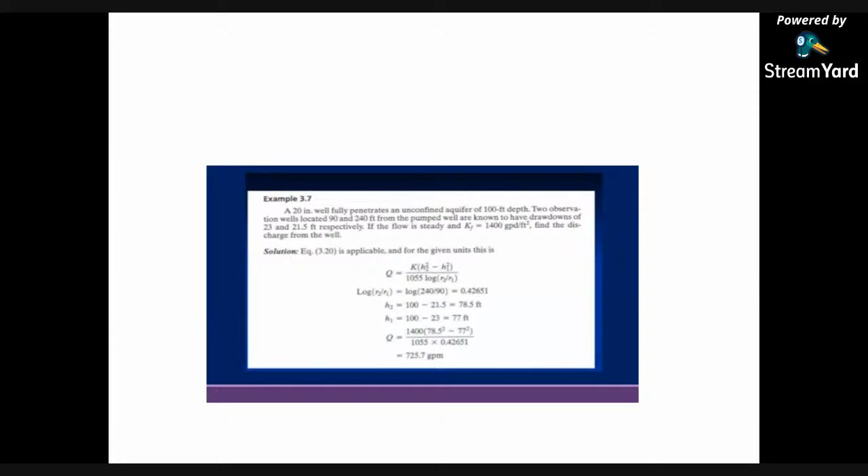So you are given with the two diameters, that is 240 and 90. Then depths are given: one depth is 21.5, away from that drawdown, and total depth is 100 feet. So 100 minus 21.5 you will get one depth, and 100 minus 23 you will get another depth. Put all the values, you will get your discharge, that is your Q value.

Now there are so many parameters related with your aquifers, like transmissibility, then permeability. So we are having different methods to calculate the transmissibility, permeability, then retentions. Once you will know all the parameters, then you may go for the final analysis or final study of the aquifer.

In this section, there can be a question on well hydraulics, either confined aquifer or unconfined aquifer. Then there can be a question based on Darcy's law, that is Q equals KA I or KA H by L.

Then there can be a numerical question based on evapotranspiration, how evapotranspiration will be calculated. Then there can be a question related with the water budget equation.

You may be given the inflow and outflow, and you have to apply the water budget equation and find out the different losses or the amount of water into the different categories which we have seen in the water cycle.

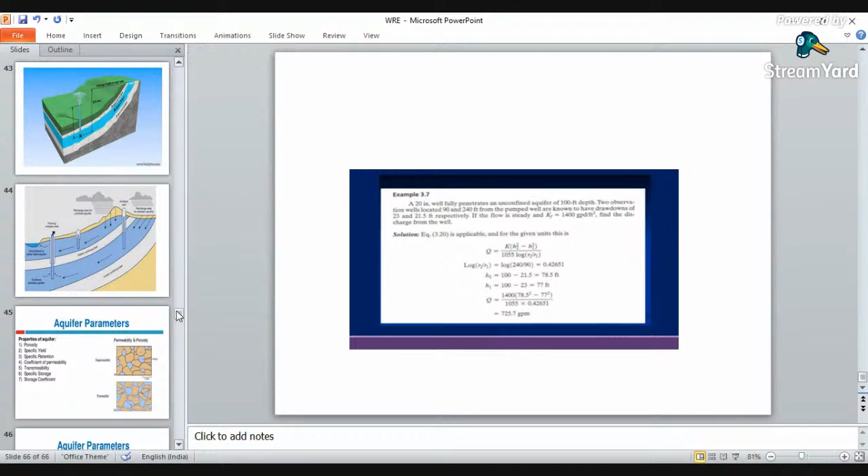Then there can be a question related with aquifer and aquitard, where a definition will be given and you have to identify which type of aquifer this is. This may be a question.

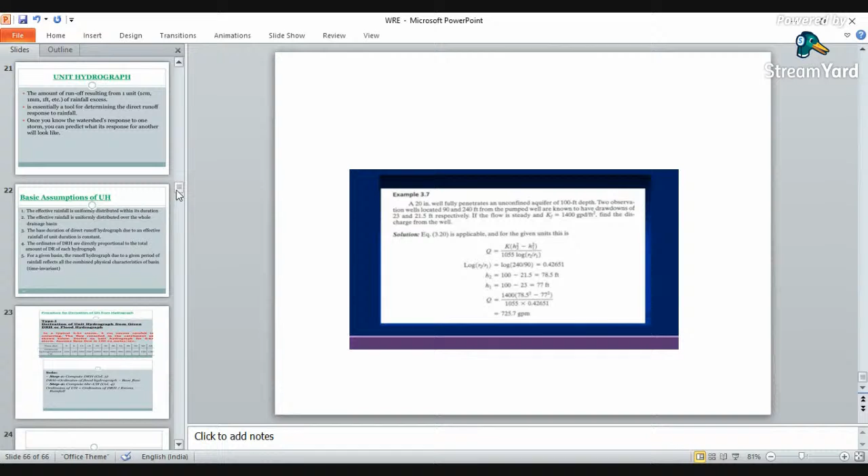Then there can be a question related with the hydrograph. Data will be given to you and you have to draw either a direct runoff hydrograph or a unit hydrograph. Generally, a question of unit hydrograph is there in competitive examinations.